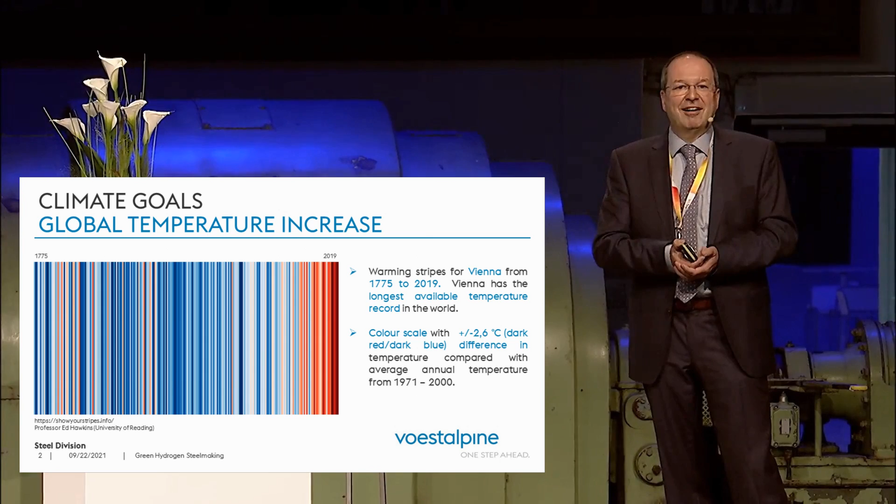So fossil carbon emissions are in the order of 40 billion tons. In 2020 there was a small dip from 36 to 34 billion tons, and believe me, in 2021 the value will reach the pre-COVID level again, or even exceed it.

Here we are at the suction hall and the coking hall, where coking gas was processed and compressed for further processing. The classical application is the coking plant. Then we have the blast furnace process, where the separation of the iron and oxygen sits, and I can use carbon or hydrogen as a reduction agent, and 75% of the entire energy input for steel making is required for this step.

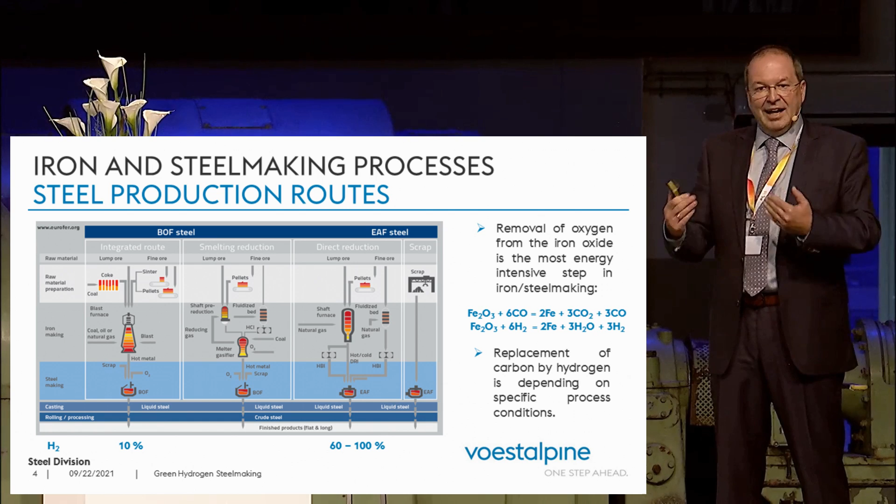But there's an intermediate step, direct reduction on the right-hand side, where iron can be produced with carbon and hydrogen and then go into the steel making process. I can use ore, but because I use gas, I already have a certain carbon benefit. This process is today already operating at 60 to 70% hydrogen, and if hydrogen is available, it can be retrofitted to 100%.

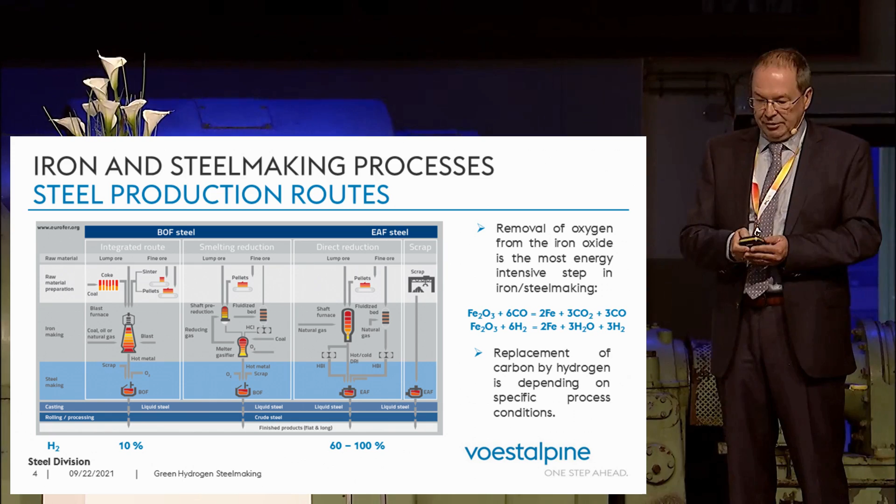You see the classical integrated route as we have it in Linz. We produce carbon monoxide, and these are 100% carbon emissions. If we use the direct reduction process with gas and the reforming process, we already use hydrogen in the form of gas, and we recycle part of the carbon dioxide and therefore produce the reduction gas. This product must then be melted in the arc furnace. Depending on the carbon load of electricity, we already achieve a carbon reduction.

What's very important: I already said that direct reduction can be carried out with gas and reforming, but I can also use hydrogen. So if I invest in a direct reduction process, everything is prepared for the use of hydrogen. That's important, and then it only depends on the electricity from which hydrogen is produced.

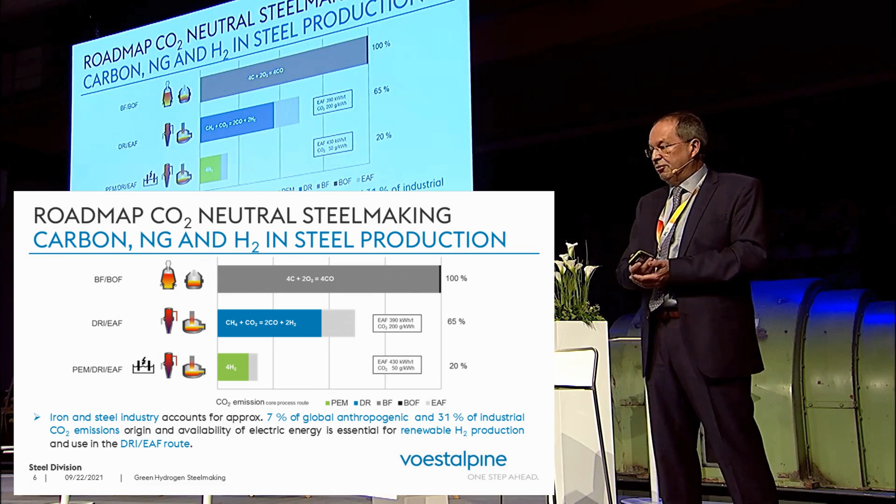And the second project: we have one of the world's largest demonstration plants for electrolysis for hydrogen, in the order of 6 megawatts. 6 megawatts is very small, however, and if I want to decarbonize Linz, then I would need 3,000 megawatts, so it's a factor of 500.

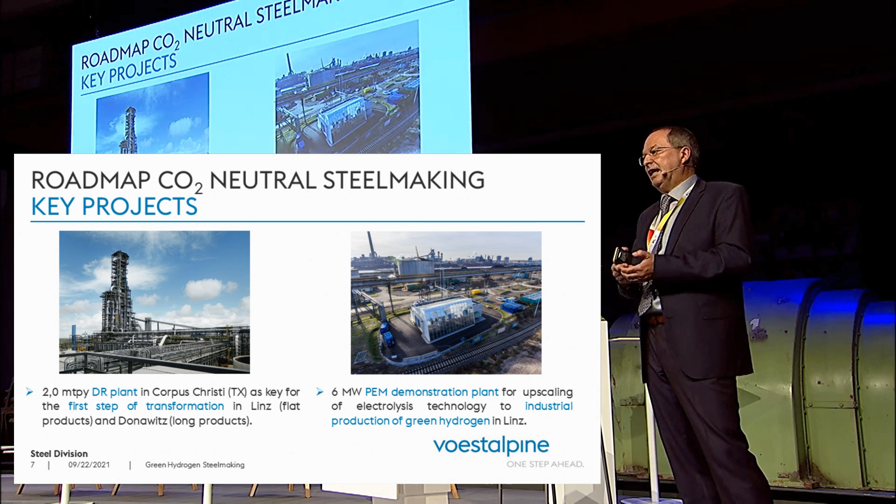But as I said, we, together with our partners, are trying to apply this technology and to upscale this technology, and we already learned about the durability of the modules from this plant. This is a very important project for us.

As I said already, the direct reduction process, you see it in the right orange block. This is the reformer, and on top you see the hydrogen that comes in. The direct reduction process is suitable for this if hydrogen is available, and I use less gas and I increase the hydrogen supply. I can do this during operation, so I can also implement a certain control process. And in our Texas plant, these functions are already integrated. We do not yet have the hydrogen, but the plant is basically suitable for hydrogen.

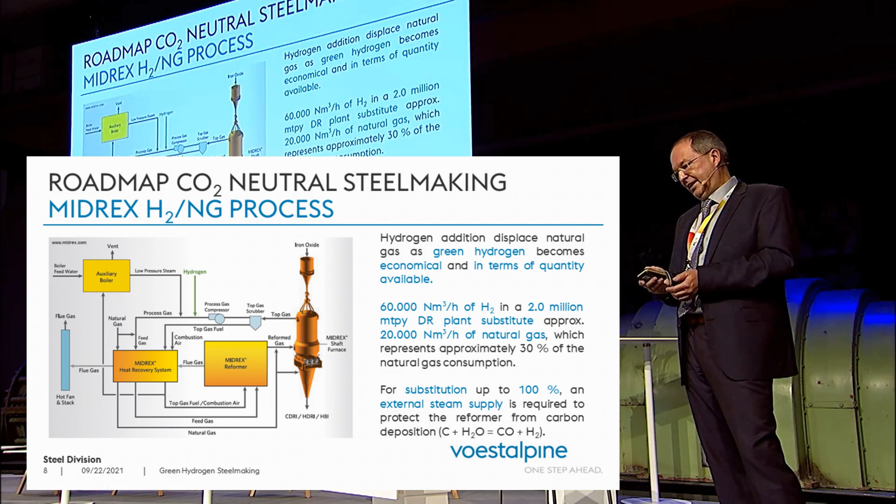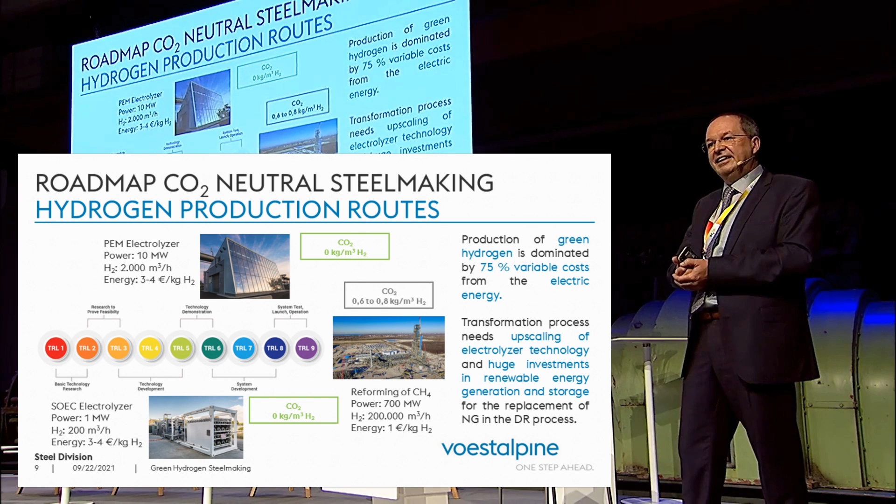So why a demonstration plant for hydrogen? We produce in Texas 200,000 cubic meters of hydrogen per hour in the reforming process. And in the coking plant in Linz, we also produce 70,000 cubic meters of hydrogen per hour from coking gas. And we adopted the PEM technology together with our partners, which currently has the highest potential for electrolysis. Then we also have high temperature electrolysis, which has a lower yield, but nevertheless it will be one of the technologies for the future.

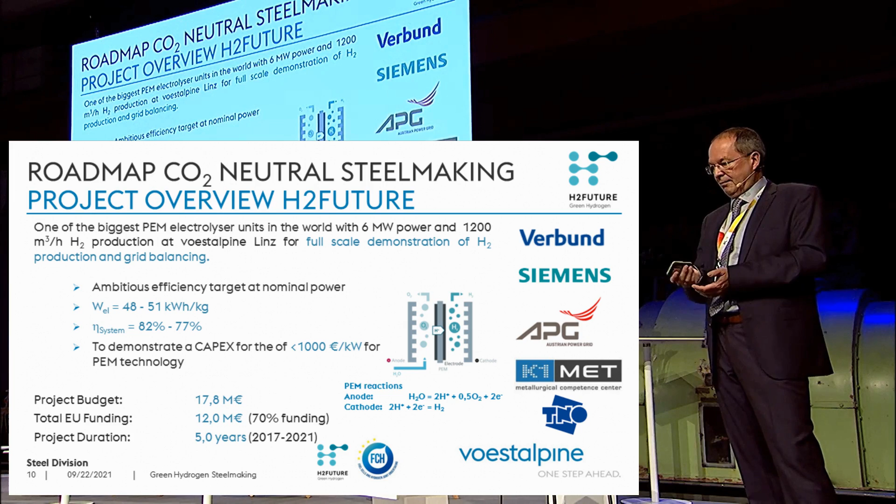I already mentioned the PEM project. This is combined with Verbund, Siemens, APG and TNO. The plant has been in full operation for 18 months. Here you see a view of the modules. We have 12 electrolysis modules. Each module has a power of 500 kilowatts. Together we have 6 megawatts, and the plant can be controlled between 1.5 and 9 megawatts.

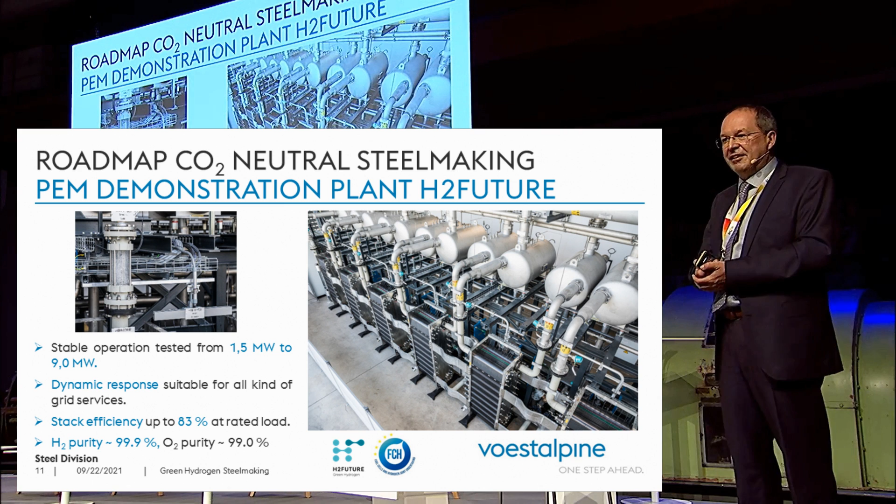Hydrogen purity is 99.9%, so the quality is absolutely sufficient for metallurgical applications. It could also be less, but it's not yet fuel cell quality, so catalytic cleaning would have to be added. We still discharge oxygen, but there will also be enormous applications for oxygen in the future, so oxygen shouldn't be forgotten.

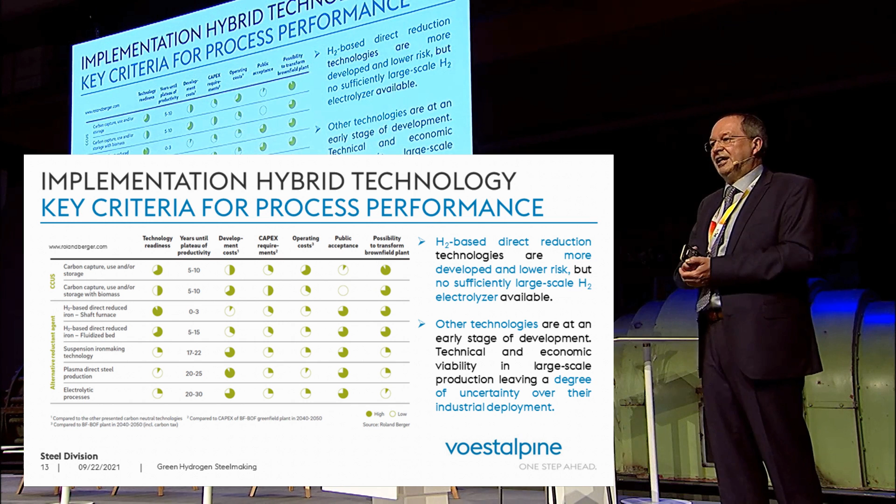So how do we convert the steelworks? You know these projects from competitors. Everyone's talking about direct reduction technologies. There are different processes. I'm not going to talk about this table. Roland Berger offers this, you can read it there, and it corresponds to our plants in the third line. You see hydrogen-based direct reduction has the highest TRL and it is the first step, but plasma melting, plasma fusion reactions and other steelmaking processes are conceivable for the future. But the first step must be direct reduction, first with gas and then with hydrogen, and this is the concept which we will also implement in Linz.

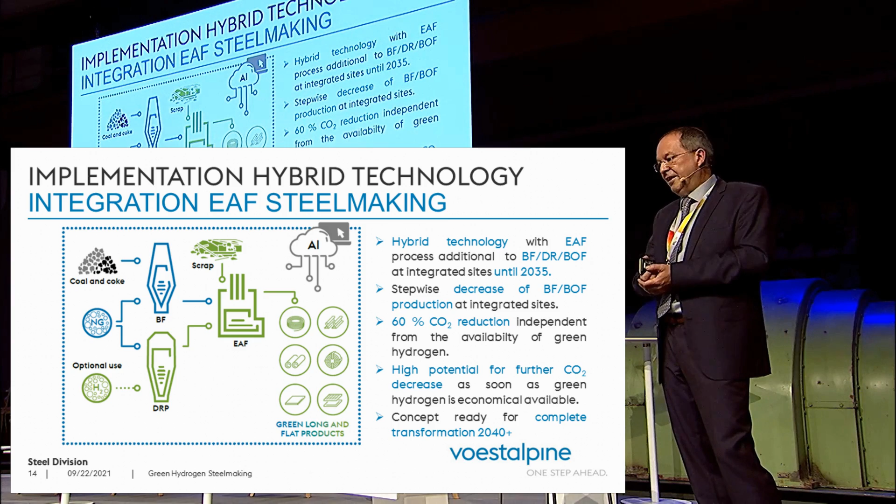We are currently intensively working on how electric arc furnaces can be integrated into our processes. We will do this with DRI from Texas, still with gas, and in the future hopefully with hydrogen, with larger scrap amounts, and so with this process route we can already achieve carbon reduction of 60% for a certain amount of steel. If hydrogen comes in, then carbon can be reduced even further. 60% reduction would be possible in this process.

This is how this roadmap can look. Today we are at the carbon end. In 2035, depending on the availability of hydrogen, we can achieve at least a 30% reduction for the entire process. And after 2050, if hydrogen and the energy are available, we can produce with hydrogen.

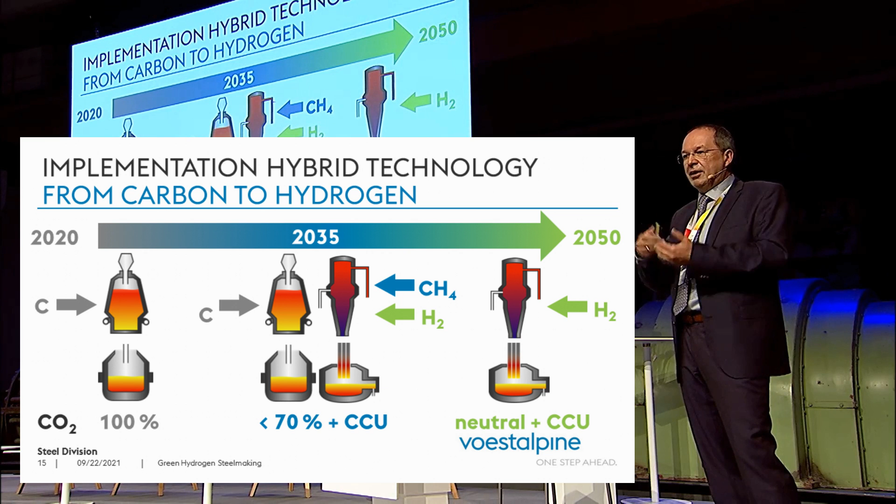Of course, we also look at CCU processes, especially for storage. The largest gas storages, with terawatt hours, in Austria are very close to our site and are operated by Austrian providers, so gas can be stored there. And you can also store methane, so CCU processes will also have a role to play. And we are available to supply this carbon.

And finally, a very interesting topic, the energy quantities that are needed. The left picture is the electricity production in Austria, and you see we produce up to 70 terawatt hours of electrical energy, 70% from renewable sources and 30% from fossil sources. If I want to produce 6 million tons of steel from hydrogen and scrap, I need 18 terawatt hours of electrical energy for hydrogen production and 2.5 terawatt hours for the electric arc furnace. To keep the rolling mills and the furnaces running, I will need another 7.5 terawatt hours. So I need 28 terawatt hours of electrical energy, and this is already half the total electricity production in Austria.

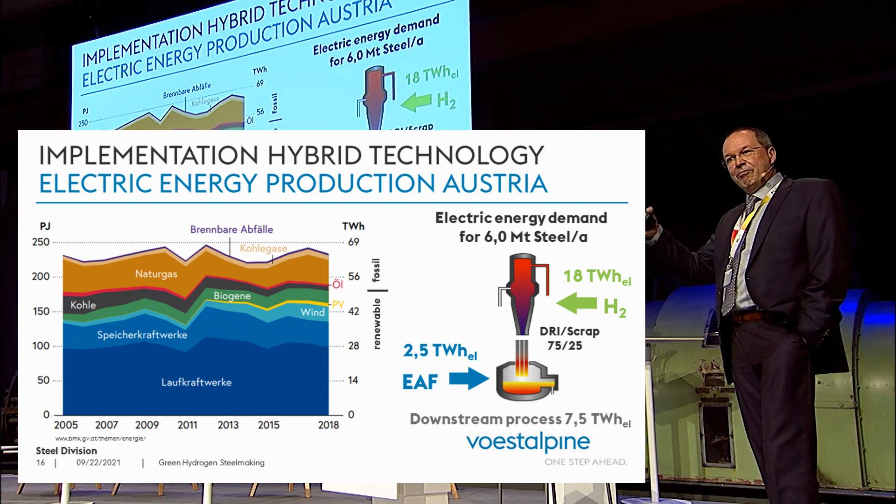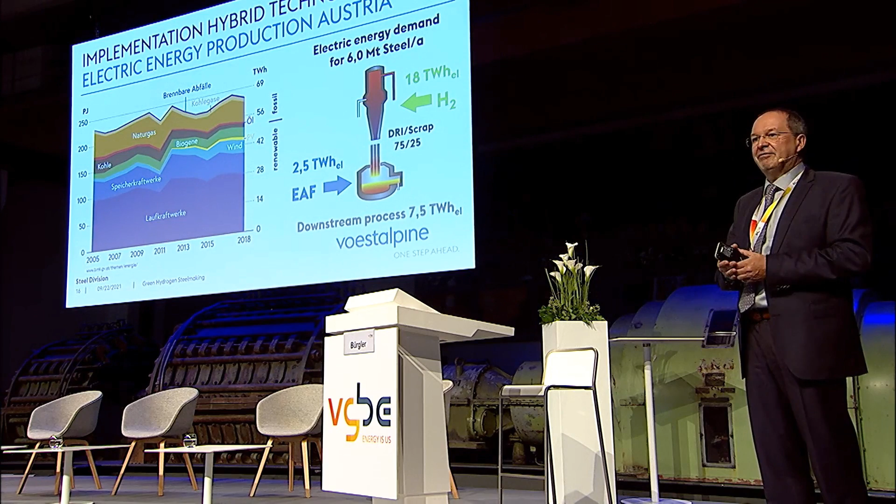And if I convert this to Germany, we have 30 million tons of steel production in blast furnaces. So this is around 140 terawatt hours according to this example. Given electricity production in Germany, we are at 1/4 of the entire electricity production of Germany, at Krupp, at Salzgitter, Dillingen and so forth. So this is the major challenge, and we will decide where is the big power cable which I can connect, or the outlets to get the hydrogen, or where are the hydrogen pipes to get hydrogen from other European or overseas regions.

So this was a short overview, and I look forward to the discussion.